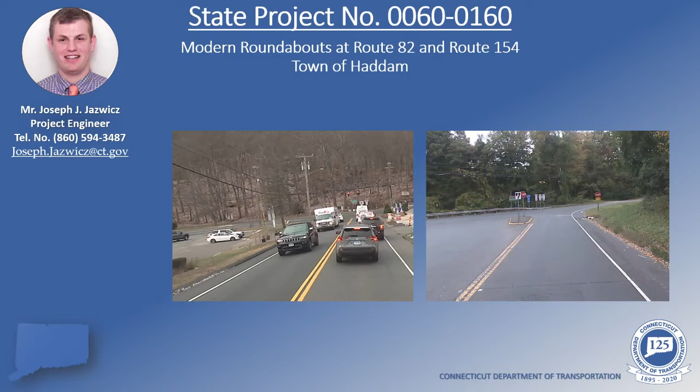This project is located on the overlapping portion of Route 82/154, otherwise known as Saybrook Road. To the east of our project, we have the Connecticut River and the East Haddam Swing Bridge. And to the west, we have Route 9. Our project is going to focus on two main intersections, which we refer to as the northern and southern intersection. The northern intersection is located where Bridge Road intersects Saybrook Road, and the southern intersection is located where the Route 9 connector intersects Saybrook Road. We'll also be discussing Bridge 622, which carries Saybrook Road over Clark Creek.

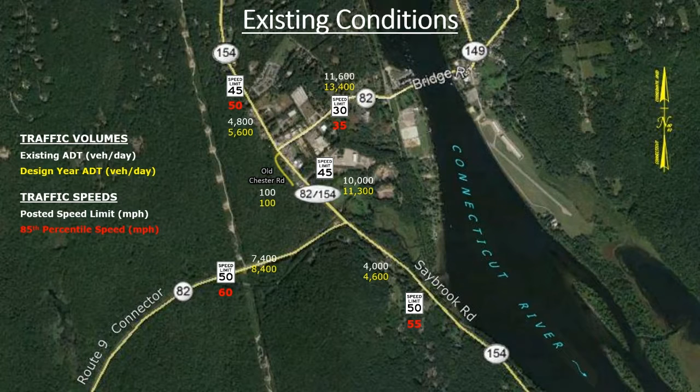Also, we look at traffic speeds throughout the corridor. As you can see here on the placards, we have our posted speed limits on our various approaches, and in red, you can see our 85th percentile speeds. 85th percentile is merely the speed at or below which 85% of vehicles will travel. It's also important to note that the 85th percentile speed is used as our design speed for our roadway geometrics when designing our roads. So for example, on the Route 9 connector, we have a posted speed of 50 miles per hour. However, the 85th percentile is 60.

Some areas of interest within the project area include the Tylerville Business District at the northern intersection, Eagles Landing to the east, as well as a Saybrook Assisted Living Facility to the north. Also, the East Haddam Swing Bridge is located 2/3 of a mile from the northern intersection. Saybrook Road and Bridge Road are a part of the State On-Road Bike Network.

Let's dive a little bit deeper into the northern intersection. The northern intersection is currently a signalized intersection. The existing equipment out there today is 27 years old. Typical service life is around 20 years, at which point we see additional maintenance and upkeep is required in order to maintain a state of good repair for the signal equipment. Also, I'd like to draw attention to the minimal pedestrian accommodations that are currently provided at this intersection.

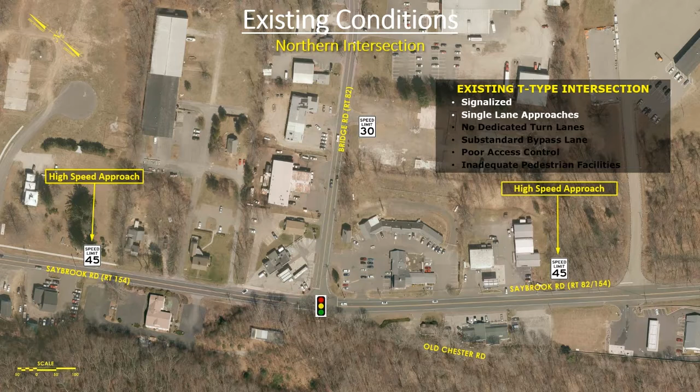Here's a plan view of the northern signalized intersection. We have single lane approaches on all approaches. However, Saybrook Road are considered high-speed approaches. We have no dedicated turn lane that exists at the intersection, as well as we have substandard bypass lanes where vehicles are using the processed aggregate off the edge of road in order to make bypass maneuvers around vehicles that are trying to turn left onto Bridge Road.

We have poor access control due to the number of driveways that are in close proximity to the intersection footprint. And finally, we have inadequate pedestrian facilities. We have narrow shoulders that aren't conducive to bike travel. We don't have any sidewalks that are prevalent here, nor do we have any dedicated crosswalks.

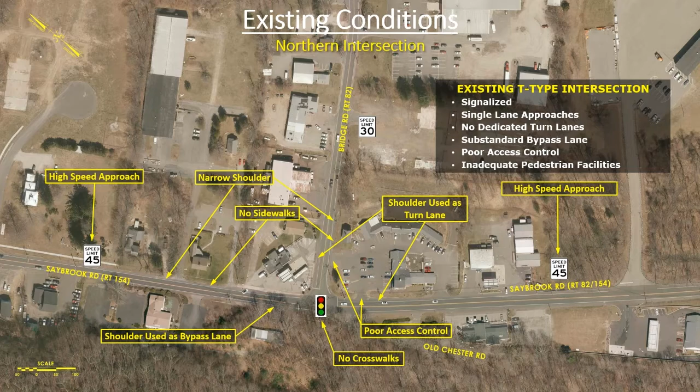Moving on to the southern intersection. The Route 9 connector is a stop-controlled approach. It is considered functionally deficient due to the large queues and backups that form along that approach. Saybrook Road is considered a high-speed free-flow facility.

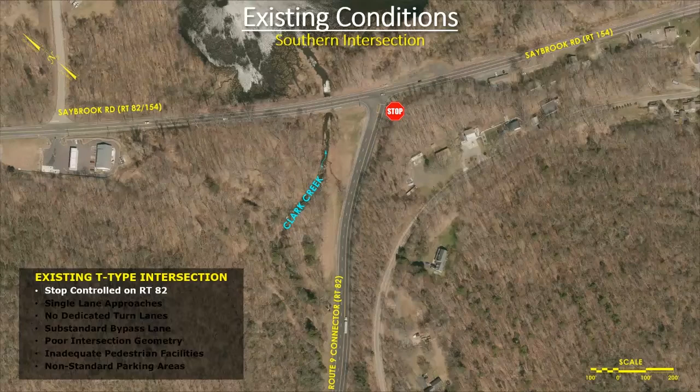Here's a plan view of the southern stop-controlled intersection. We have single-lane approaches on all approaches. All are considered high-speed. We currently have no dedicated turn lanes that exist here, as well as we also still have substandard bypass lanes. And we have poor intersection geometry that is created by the skew of the Route 9 connector as it intersects Saybrook Road.

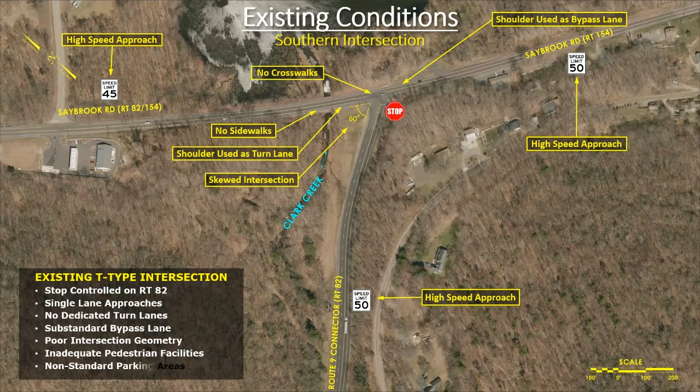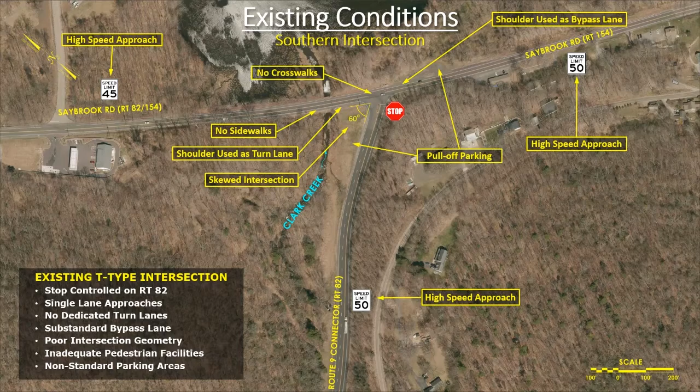We have inadequate pedestrian facilities. There's no sidewalks, nor are there any crosswalks that are present here. And finally, we have non-standard parking areas. Currently, these two pull-off areas are used by vehicles that are trying to access the Clark Creek Cascades. The department recognizes this natural feature that is in existence at the southern intersection, and we plan to incorporate parking into our proposed design, which we'll explain further on in our presentation.

Predominant turning movements that exist within our project area consist of, in the AM, vehicles traveling from destinations east through our project limits in order to access Route 9. In the PM, we have the opposite movement where vehicles are traveling from Route 9 through our project limits in order to access destinations east via the East Haddam Swing Bridge.

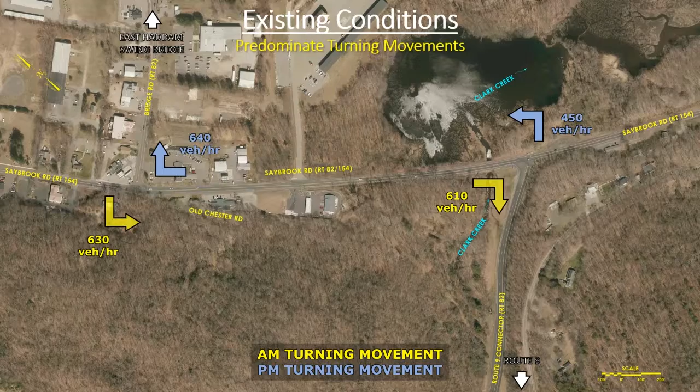As a part of the department's initial review, we look at crashes that are occurring within our project limits. We gather crash data over a course of a 3-year period. From that data, we develop crash diagrams to show the location, type, quantity, and the severity of those crashes. Once a crash diagram is developed, we analyze them for patterns.

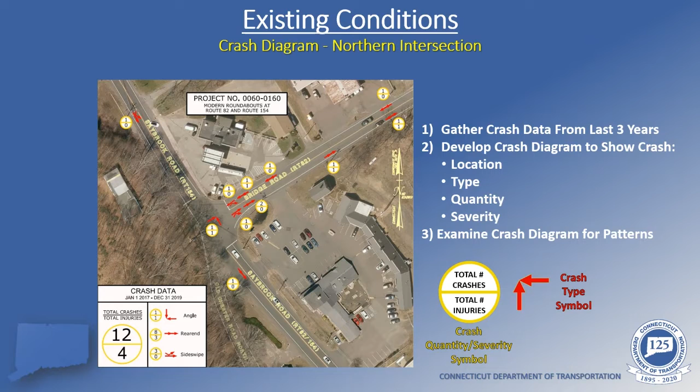Over a course of a 3-year period at the northern intersection, we saw a total of 12 crashes resulting in 4 injuries. Those crash types consist of angle, rear ends, and side swipes. While there aren't many crashes occurring here today that are anything abnormal, we would like to note that there was one angle type crash that occurred here. While it's a low frequency event, they tend to have high severity, and that is due to high vehicle speeds that are seen on Saybrook Road throughout our project area.

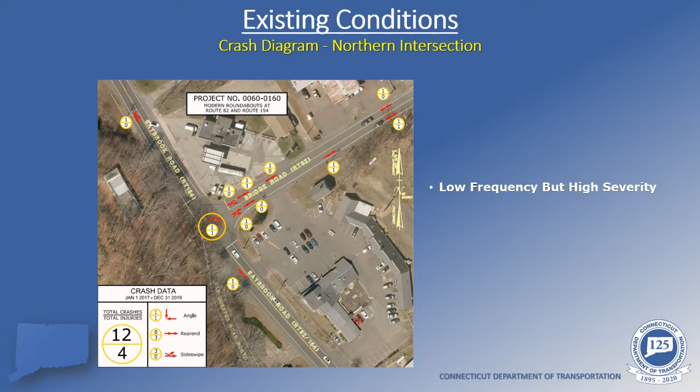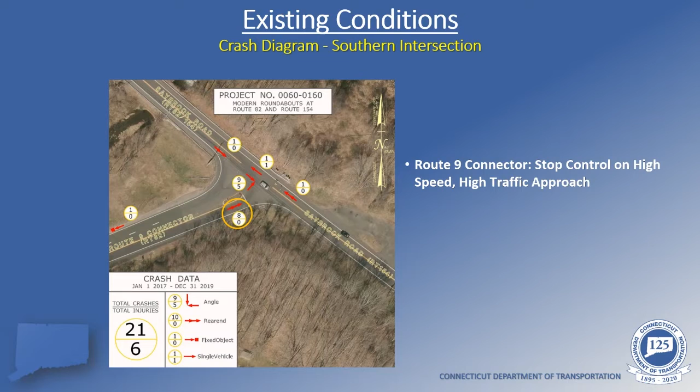Over the course of that same 3-year period, there was a total of 21 crashes resulting in 6 injuries that occurred at the southern intersection. There's 2 main prevalent crash types that are occurring here. The first being rear ends that are occurring on the Route 9 connector. This can be attributed to the stop control on the high-speed approach, as well as the high traffic volumes that are seen along that segment of roadway.

The second are these angle type crashes that are occurring within the intersection. This can be attributed to Saybrook Road being a high-speed, free-flow facility, as well as driver expectations of a vehicle trying to depart the Route 9 connector. If a vehicle is traveling southbound, based off of traffic turning volumes, 80% of them are trying to access the Route 9 connector, whereas 20% of them are trying to continue on a through movement.

Based off of driver expectation, a vehicle trying to depart the Route 9 connector to make a turning maneuver onto Saybrook Road is envisioning vehicles to make a turn onto the connector. However, sometimes they're continuing on a through movement, which creates a conflict point leading to a number of angle crashes, which is prevalent here.

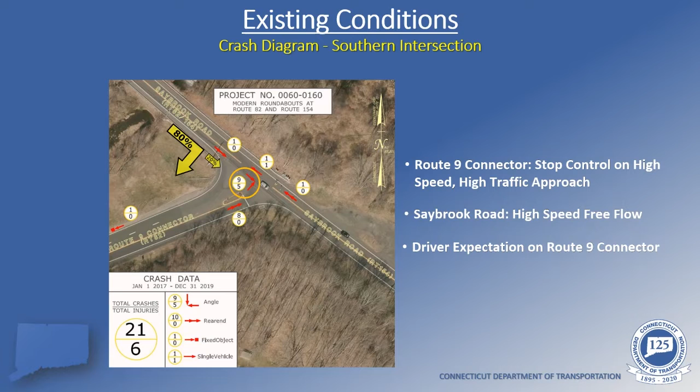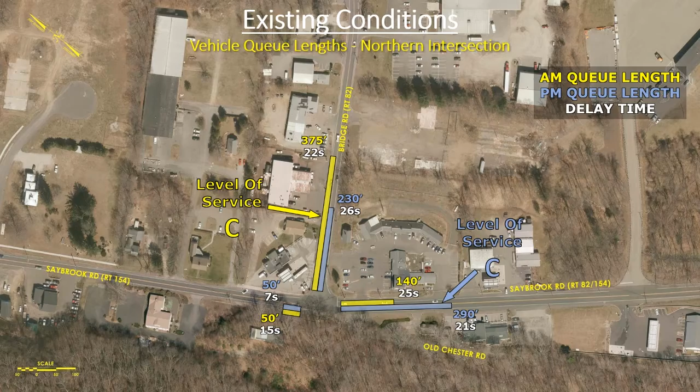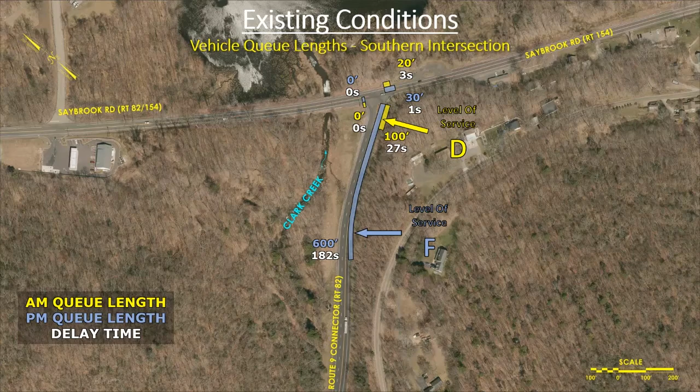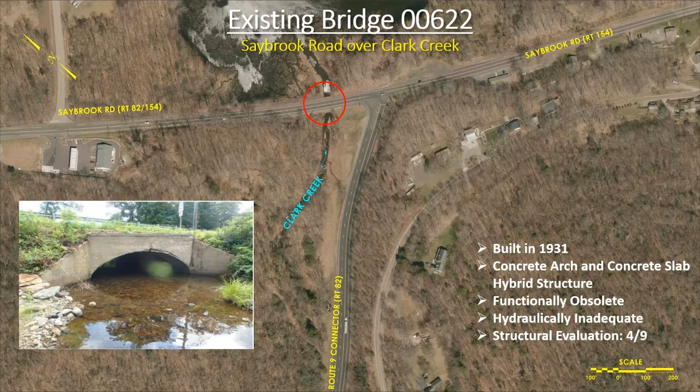Immediately north of the southern intersection, we have Bridge 622, which carries Saybrook Road over Clark Creek. It was built in 1931. It's a concrete arch and concrete slab hybrid structure. It's considered functionally obsolete and hydraulically inadequate based off of our hydraulic analysis. The most recent structural evaluation gave this structure a 4 out of 9. Based off the condition and age of this structure, the replacement of this bridge was added to the scope of this project.

Project purpose can be broken down in 3 separate areas. We like to refer to them as project goals. First, we want to increase safety by reducing the vehicle speeds throughout the corridor, as well as the frequency and crash severity that they're experiencing. As well as we also want to increase sidewalk connectivity. Second, we want to improve traffic operation by reducing vehicle backups and the delays that they're experiencing. And finally, we want to replace Bridge 622 as a part of this project. I will now turn it over to Charlie, who will talk about the proposed improvements.

All right, thanks, Joe. My name's Charles Grillo, and I am the project designer assigned to 6160. And at this time, I'm going to be talking to you about the proposed project improvements. So based on those existing conditions and the project goals that were just previously discussed, the department determined that the preferred alternative for both the northern and southern intersection was going to be the modern roundabout.

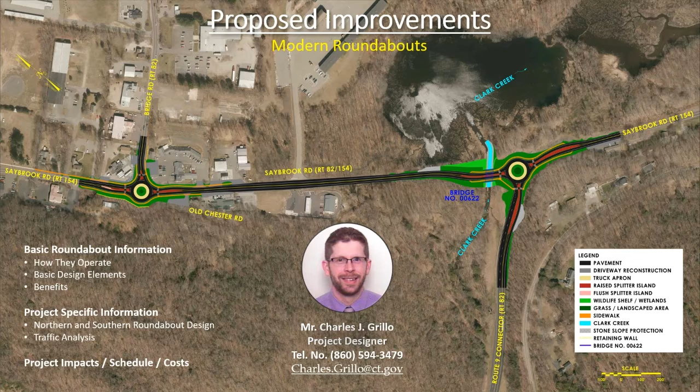So first thing I'm going to cover are some basic roundabout information, such as how they operate, their design elements, and some general benefits. After that, I'll get into some more project-specific information related to design considerations for both the northern and southern roundabout and a traffic analysis for both of those. And finally, I'll wrap up with a description of the project impacts, schedule, and cost.

All right. The first thing we're going to talk about is the basic operations of a modern roundabout. So vehicles approaching a roundabout need to slow down to about 15 to 20 miles an hour before they enter the roundabout. Vehicles approaching the roundabout also have to yield to vehicles that are already inside of the circulatory roadway. Once a vehicle enters the circulatory roadway, they have the right of way and don't have to yield or stop at that point. And when a vehicle wants to exit the roundabout, they simply engage the right-hand turn signal and then exit the roundabout.

Bicyclists can enter the roundabout with traffic, meaning they'll take a lane and then they can traverse through the intersection in that fashion. Or if they're uncomfortable with that, they can dismount and then they can use the sidewalks and crosswalks to get to the intersection. Pedestrians will obviously be using the sidewalks and they will be crossing at the designated crosswalks.

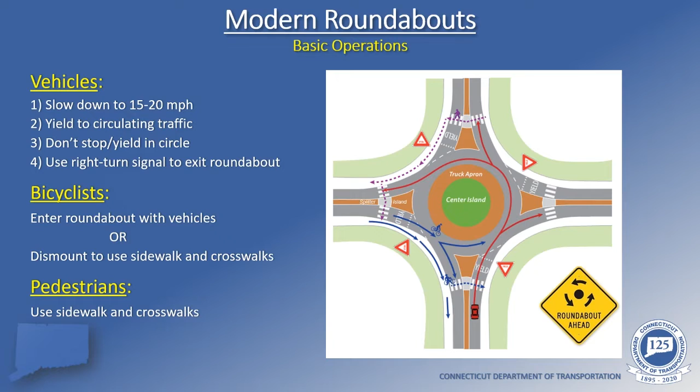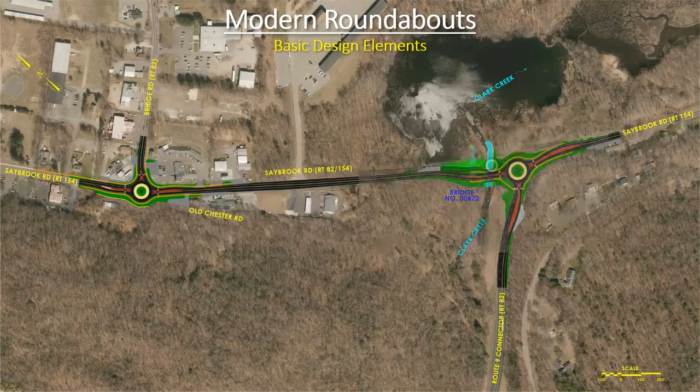Next thing I want to talk about are some basic design elements that are common for all modern roundabouts. So I'm just going to use the southern roundabout to describe these. And the first element I'm going to talk about are the splitter islands. Splitter islands are these raised median structures. They are typically granite curbing with a stamped concrete finish, as you can see in the photo there. And they're designed to channelize traffic and induce curvature.

So this is really important because we need to safely and slowly bring vehicles' speeds down before they enter the roundabout. So taking the Route 9 connector, for example, where speeds are upwards of 50 or 60 miles an hour, we have these successively tighter curves on that approach that physically slow the car down so it can enter the roundabout at that safe 15 to 20 miles an hour. So the splitter islands help direct the cars through those curves and slow them down.

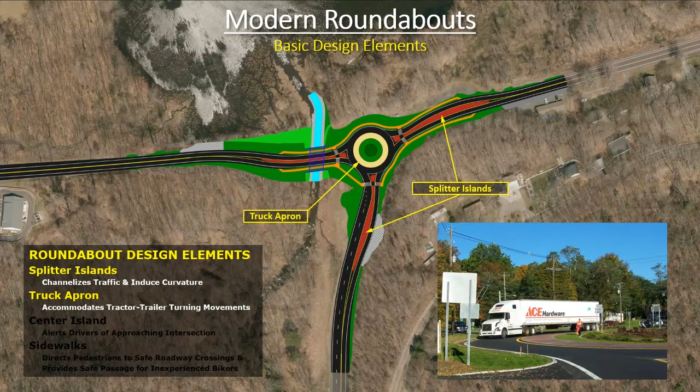Next design element we're going to talk about are the truck aprons. Truck aprons are designed to accommodate tractor-trailer turning movements through the intersection. So as you can see in the photo, the cab of the truck is designed to stay on the circulatory roadway, but the back end trailer can track over the truck apron as that truck is making a turn. So the truck aprons are typically granite curbing with stamped concrete finish, but these are mountable, so they have a lower profile than the splitter islands, and they're designed so that the truck can mount it, but it would be uncomfortable for a passenger car to drive over top of that.

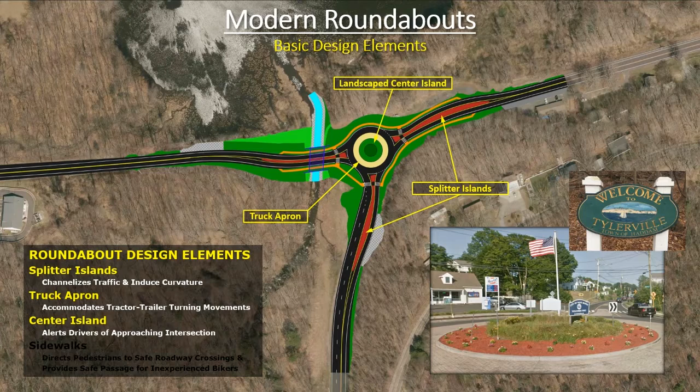All right, next element we're going to talk about are the center islands. Center islands are designed to alert drivers that they're approaching an intersection by providing a visual break in the roadway. So this has a proven traffic calming effect, so vehicles will slow down when they see that center island. Center islands also can be used as a gateway treatment to the community, so you can plant landscaping and install a sign, sort of like what we see in the photo there.

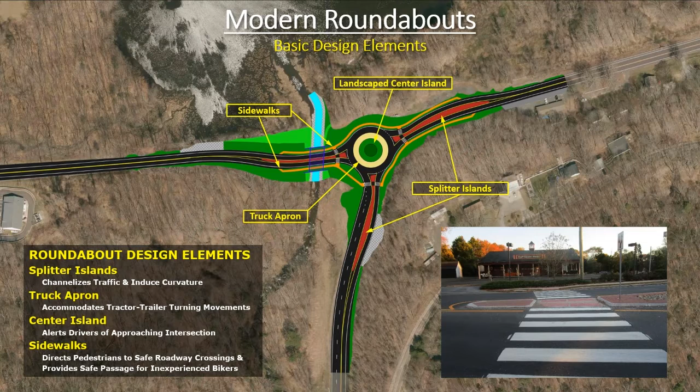All right, last design element to talk about are the sidewalks. Sidewalks are required to direct pedestrians to the safe roadway crossings. So we want them crossing at designated crosswalks using that pedestrian refuge area in the splitter island, as you can see in the photo. And what we don't want to see are any pedestrians crossing in the truck apron or center island. So it's very important that we direct pedestrians to those safe roadway crossings. And then also, the sidewalks are designed to provide safe passage for inexperienced bikers. So the bikers need to be able to dismount and then walk through the intersection if they're uncomfortable with riding through the intersection with traffic.

So roundabouts achieve their safety benefits in two main ways. First one we're going to talk about is the fact that they reduce conflict points. Now, conflict points are all the opportunities that two cars have to collide with each other at any given intersection. So what you will notice is roundabouts eliminate all the crossing type conflict points. And the crossing conflict points are the most severe. They're the ones that result in either T-bone or head-on type crashes. And what a roundabout is left with are just those diverging and merging conflict points, which generally result in sideswipes or rear ends, which are the less severe type of crashes.

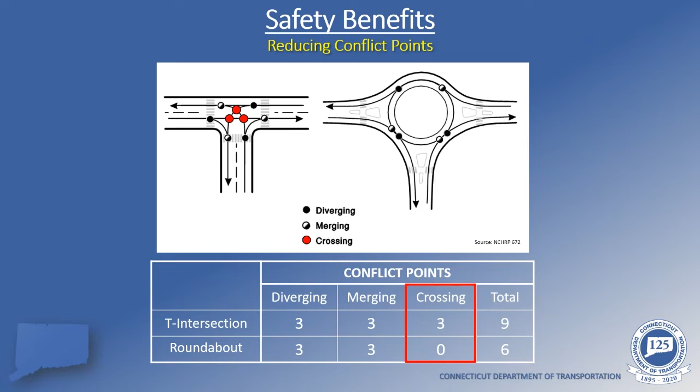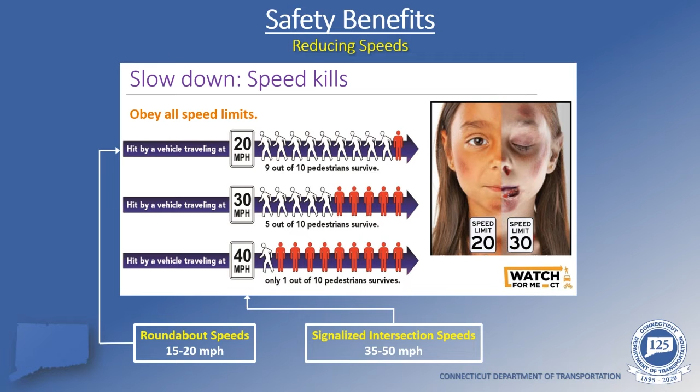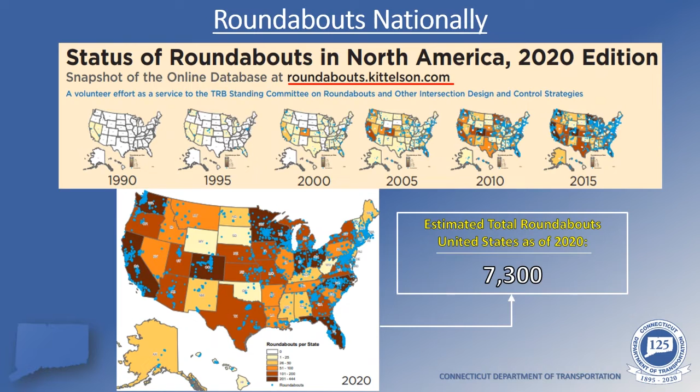So because of this, roundabouts have been increasing in popularity over the years. In the United States, you can see in the 1990s, there was just a few roundabouts in California and Nevada. But 30 years later, you can see now we have over 7,000 roundabouts in the United States. And in Connecticut, we're also trending towards installing more roundabouts. Currently, we have 13 that are installed and operational, and we have another 14 in design, planning, or construction.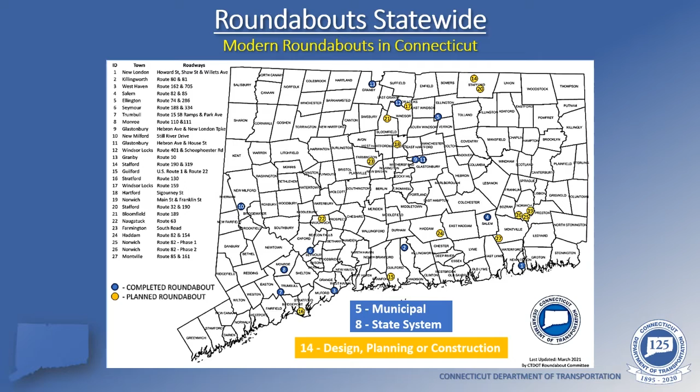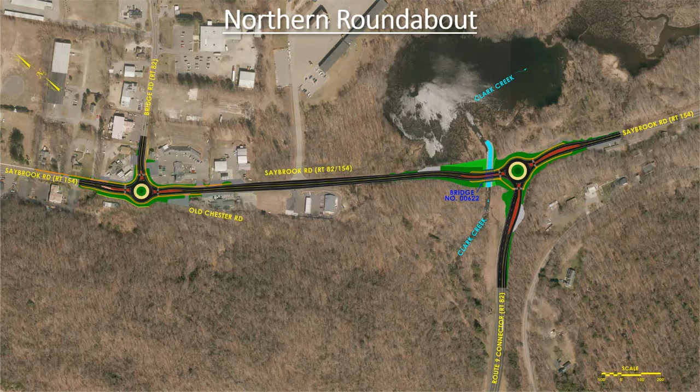Now we'll discuss some project-specific design considerations that went into the design of the northern and southern roundabouts. And we'll start off with the northern roundabout. So the first design consideration we're going to talk about is a roundabout footprint. So there are a lot of businesses within very close proximity to this intersection, and we want to reduce the impacts to those businesses by reducing the footprint of the roundabout as much as we could. So the first thing we did was propose this 115-foot inscribed circular diameter, which is a little bit on the smaller side for a single lane roundabout, but we're able to get that in.

And then we also wound up shifting the roundabout slightly to the west. There was a large hill to the west of the intersection, but we're proposing to install a retaining wall to help limit the impacts of the cut slopes in that area.

Next design consideration to talk about is access control. So we wanted all vehicles to be able to make left and right hand turns out of all the driveways within the project area. So we're proposing a flush splitter island be installed along the Saybrook Road southbound approach so that vehicles can make left and right hand turns out of the Mobil gas station there. And the other access control issue was we did have a lot of driveways within close proximity to the intersection. So we are proposing to close one driveway and relocate another slightly at the Tylerville Village Plaza.

Sidewalk connectivity was a big consideration at the northern intersection. We wanted to be able to tie into existing sidewalk to the north of our project that went to the assisted living facility. And then we also wanted to tie into project 60-162, which is proposing to build sidewalk from Eagles Landing along Bridge Road to this intersection. So we're also going to be tying into the sidewalk that is constructed under that project.

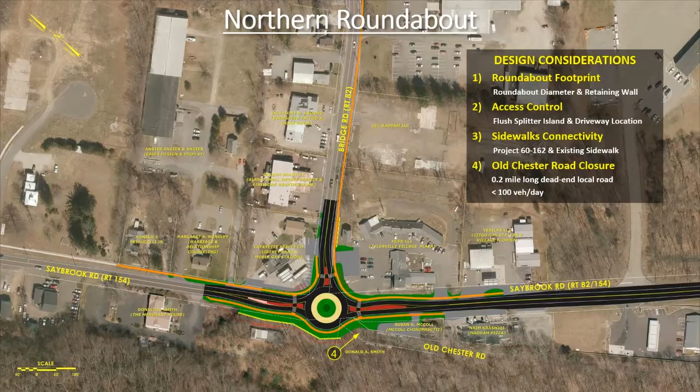Next, we're going to talk about some design considerations that went into the southern roundabout. So the first thing you can see is that the southern roundabout has a 130-foot inscribed circular diameter that is more typical for single-lane roundabouts. Just want to point that out. But the first design consideration we're going to talk about are the high-speed approaches. So because we have vehicle speeds of 50 or 60 miles an hour approaching this intersection on all legs, you're going to see these longer splitter islands, which are required to safely slow the vehicles down before they enter the roundabout.

Next design consideration to talk about is replacement of Bridge 622. So we're proposing to relocate this bridge upstream on Clark Creek. We're doing this so that we can build this bridge entirely offline, meaning we can construct it while still maintaining traffic on the existing bridge. Also, when we relocated that bridge upstream, it helped with the curvature we wanted to induce to help slow vehicles down before they enter the roundabout on that leg.

Bike connectivity was a consideration for this intersection. Although there's obviously not as much pedestrian and foot traffic here, Saybrook Road is part of the state on-road bike network. So because of that, we really want to make sure we provided those sidewalks so inexperienced bikers can dismount and walk through the intersection.

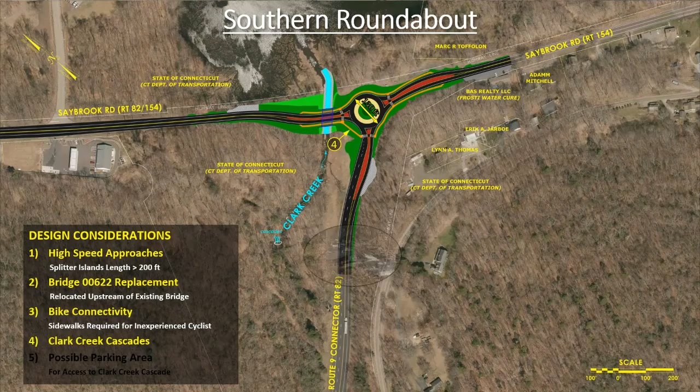The next consideration was the Clark Creek Cascades. So we recognize that this is a draw for the public and local residents. So we wanted to incorporate this into design. So there's a possibility of us installing a viewing area of some sort in the location shown there. We're going to discuss this with the town and sort of try to figure out something that they would like to see installed there. And then in addition to that, we were hoping to install some official parking areas and kind of get rid of those dirt pull-offs.

So we'll install the parking, and then people can either use the sidewalk system or a trail system to access the Cascades. So none of that's finalized yet, but we're talking with the town, and hopefully we're going to be incorporating this into design in the near future.

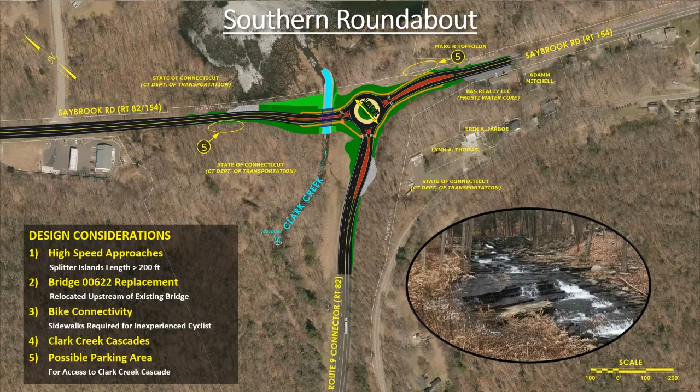So next we're going to talk about the 2040 queue lengths and delays at the northern and southern intersections. So queue lengths, again, are just the backup we were expecting to see, and 2040 is the design year, so we're going to be using those projected future traffic volumes when we're analyzing these intersections at this point. So we're going to be comparing the no build and the roundabouts.

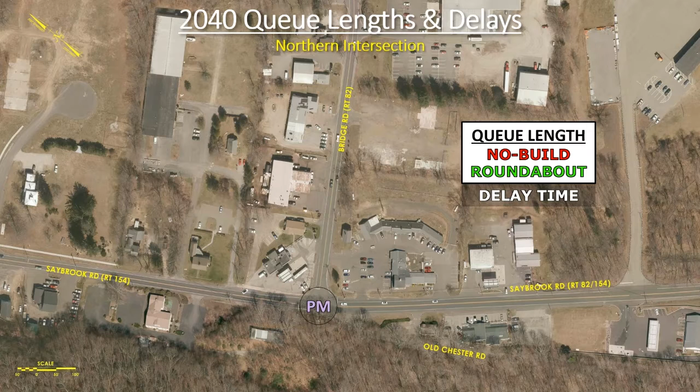Next, we'll look at the PM peak hour. So in the PM, we have the larger backup on Saybrook Road northbound as cars are coming from Route 9 and then trying to turn right and head over the Swing Bridge. So as you can see, the roundabout handles traffic better than the signalized intersection. Not as big of an improvement there, but still handling it better.

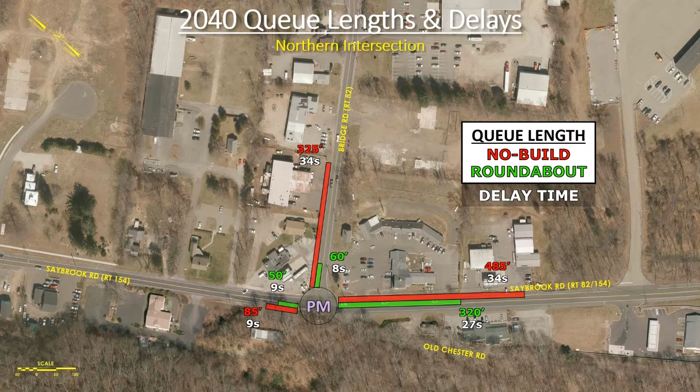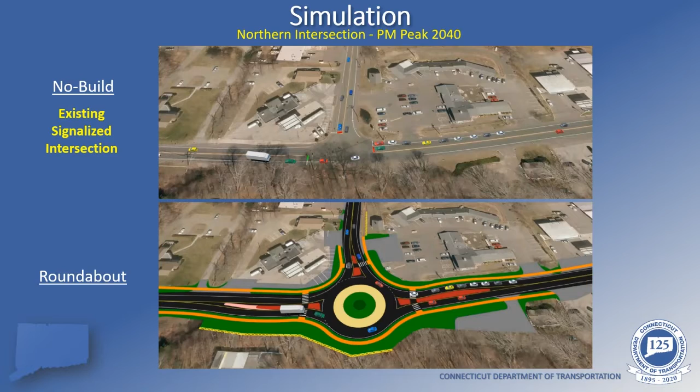Right, now we can talk about the southern roundabout. So AM queue lengths here. No build is stop controlled on the Route 9 connector. So you can see a backup from that. And then again, Saybrook Road is free flowing, so there are no backups or delays there. And you can see how the roundabout handles that. Obviously, there's a larger backup on Saybrook Road because you're going from free flow in the existing condition to the yield control with the roundabout. So there will be a little bit of an increase of backup there.

But one thing I want to draw your attention to is the fact that you can see that the backup for the roundabout and the signalized intersection are both 180 feet. But you can see how the delay, the roundabout basically clears its backup almost 5 times faster than the stop sign can. So I just want to draw your attention to that.

Looking at the PM peak backup, you can see that the Route 9 connector with the stop control just really isn't acceptable with nearly 1,000-foot backup and 6 minutes of delay. Just something that really needs to be addressed. And these are the backups and delays for the roundabout. So considerably better than the existing stop controlled intersection.

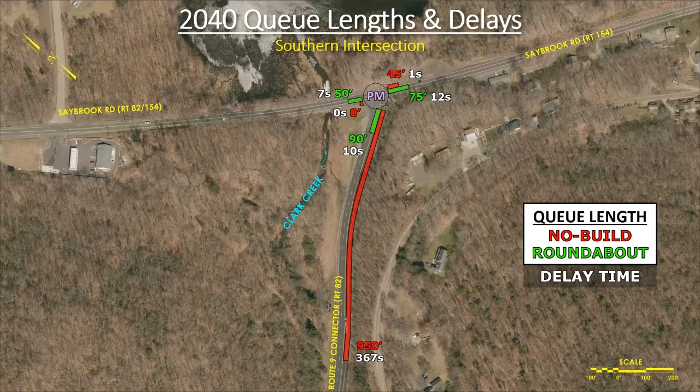Before we move on, I just want to take a moment and discuss the East Haddam Swing Bridge, which was brought to the department's attention by the town and numerous residents as a source of concern. Essentially, the problem being when the East Haddam Swing Bridge is in the open position, traffic can back up on Bridge Road all the way to the intersection with Saybrook Road, and sometimes even back up along Saybrook Road to the intersection with the Route 9 connector.

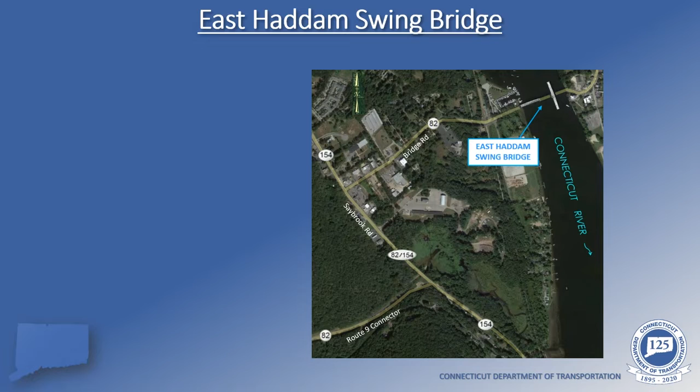So the department recognizes this issue, and while unfortunately we can't really do a whole lot to address that with the intersection improvements proposed on 6160, I did want to make everyone aware that there is another project that is currently being proposed, Project 40141, which is going to rehabilitate the swing bridge and improve the mechanics of it.

So with the completion of that project, the department is anticipating to see a swing cycle time reduction of about 20%. So with that reduction in the cycle time, you can expect to see up to 1,000-foot reduction in the backups on Bridge Road. And essentially, with the reduction in backups and the improved operations of the swing bridge, we're hoping to see a reduction in occurrences of the backups on Bridge Road reaching the northern intersection.

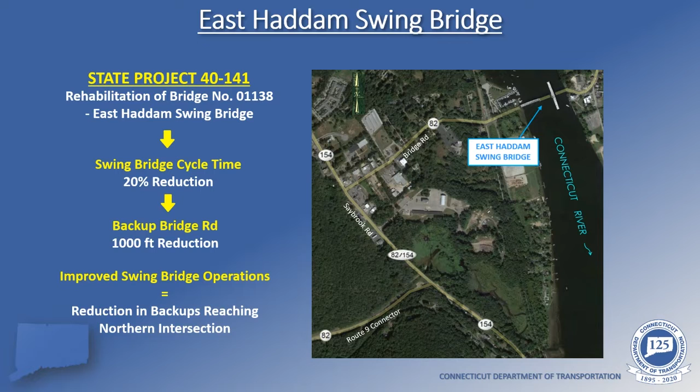All right, now we're going to start our conversation about the project impacts, and we're going to begin with the rights-of-way impacts. So at the northern intersection, there are a lot of businesses within close proximity to that intersection, and that is where we're going to see the majority of our rights-of-way impacts. So the department is anticipating partial acquisitions of 5 properties, and an additional 10 properties are going to require easements or rights in that location.

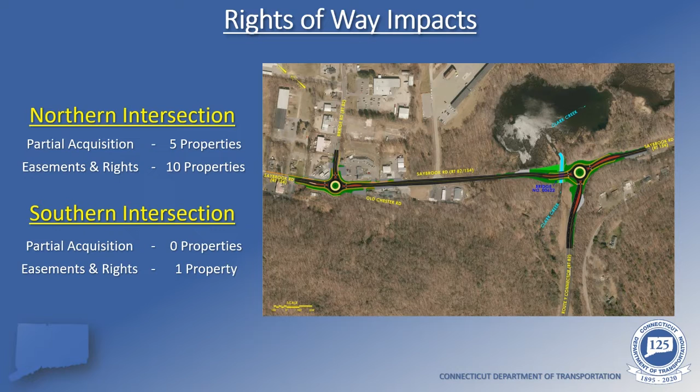At the southern intersection, rights-of-way impacts are not as big a problem or a concern, so we only anticipate 1 property requiring a right or an easement there. So with us in the meeting today, we have Matt Giannakopoulos, who works for the department in the rights-of-way unit, and he is going to discuss the rights-of-way process in a little bit more detail at this point. So I'm going to hand the presentation over to him now.

Thank you, Charlie. I am Matt Giannakopoulos, and I am a right-of-way coordinator with the Department's Division of Rights-of-Way. It is our office's responsibility to acquire the property rights needed for transportation projects. The proposed project design requires the acquisition of property rights, so I'd like to give a brief overview of the Department's right-of-way acquisition process. Please keep in mind, though, that the specific impacts are still being fine-tuned and may change as the design progresses.

Any property rights will be acquired in accordance with Connecticut General Statutes Sections 13A-73 and 13A-98E. And whenever there is federal money used in any phase of a project, the department must adhere to the Uniform Relocation Assistance and Real Property Acquisition Policies Act of 1970 as amended. Once the design has moved to the point where we are ready to begin the acquisition process, each affected property owner will receive a formal letter of intent to acquire from our office, along with a property map which depicts the exact property rights to be acquired.

At that point, our office will determine the fair market value of those property rights and use that value to establish an offer of just compensation. The offer will be sent out to the owner in writing, and a right-of-way agent will be available to meet with the property owners and explain the project, go over the specific impacts to the property, and explain how the state developed its offer. The property owner will have a reasonable time to consider the state's offer and enter into negotiations. If an agreement is reached, the state will prepare all the necessary paperwork and record the deed and the property map on the town land records.

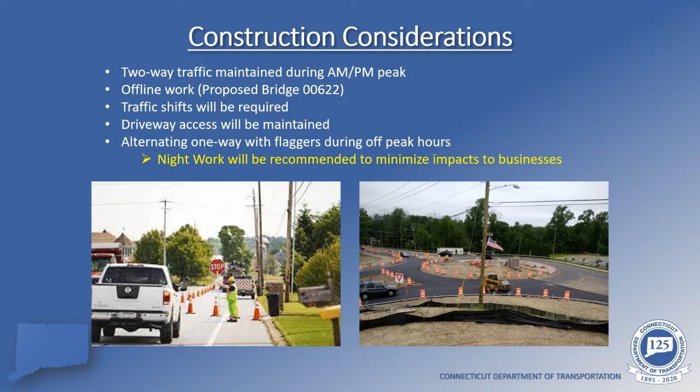And project 40141, the rehabilitation of the swing bridge, is going to be happening concurrent with our project. And project 6162, the Bridge Road Sidewalk project, is going to be happening ahead of our project. So we've begun coordinating already with those designers, and we're going to make sure that the construction process is as smooth as possible.

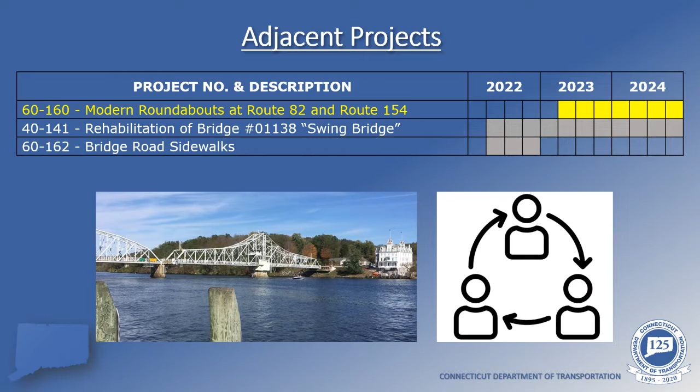So the last thing I'm going to talk about is the project cost and schedule. Construction cost is going to be about 7.3 million. Of that, 80% is going to be federal, 20% is from the state. We're expecting to complete our design in the fall of 2022, starting construction in the spring of 2023, and then we'll be wrapping construction in the fall of 2024.

So this concludes the formal presentation of Project 6160. And at this time, we're going to be moving into the question and answer phase of tonight's meeting. So I just want to let you all know that there are a number of ways that you can submit your questions to the design team. Right now, you can enter your questions into the MS Teams chat window if you're present at the live event. We are also accepting questions via the project email.

So that would be dotproject60-160@ct.gov. You can also phone in your questions to the project voicemail. So the number for that is 860-944-1111. So yep, all those questions, just send them in. We're going to be posting them into the Q&A chat window, and then we'll be answering them live right now. So yeah, thank you very much for your time, and I'm going to be handing this over to Joe Arsenal now.

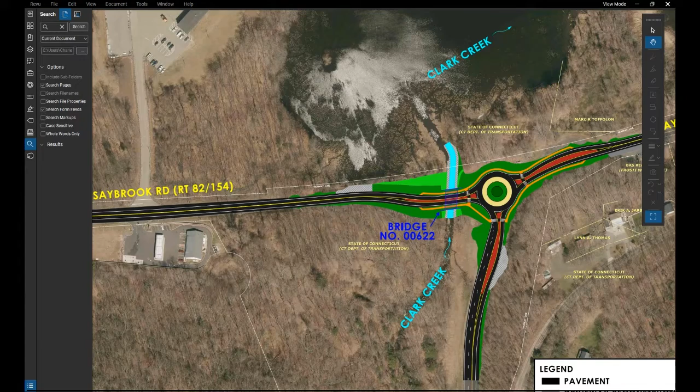Yeah, thanks, Joe. As Charlie talked about earlier in the roundabouts basic operations, when we look at truck turning movements, we design them based off of a certain type of design vehicle. So in this case, it's a tractor trailer, as was shown in that picture. And we design our truck apron to accommodate the cab that is tracking on the circulatory roadway, but the trailer itself actually tracks on the truck apron. So it's designed to traverse through the circulatory roadway in that type of fashion.

In regards to the oversteering, we use software that has a turning analysis based off of industry standards, so that we make sure that we're not over tracking, hopping curbs, minimizing that to the best of our ability based off of what the software is showing for us.

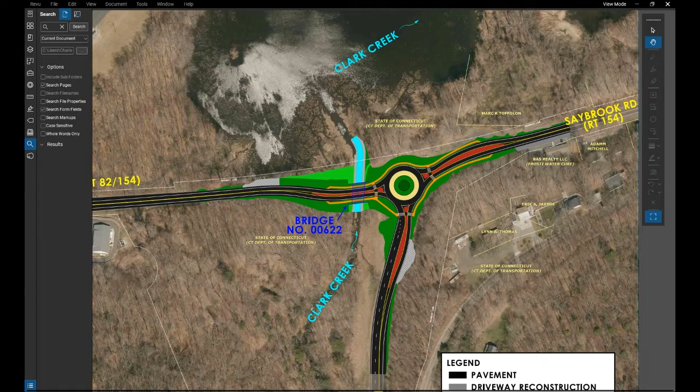Okay, thanks, Joe. Looks like we just got another question in. The question is, had the DOT completed thorough due diligence at peak traffic with a bridge opening scenario? It appears that the traffic studies conducted to justify this $7.3 million project were all conducted at less than realistic conditions, i.e. pandemic, rainy, cool, Monday, etc. So I could start off with a little bit about this. I actually believe our traffic data was collected during 2017, and I believe we collected it during the summertime and also off-season times. Joe Jaswitz, can you confirm that?

Yeah, that's correct. When we originally collected our traffic data it was during the spring time frame, but we were concerned about seeing an increase in vehicle traffic due to summer, due to the tourist industry. So we also collected midday summertime traffic volumes. Okay, great. So what you might be referring to is we do have traffic volumes that we post online. Some of those were conducted potentially during the pandemic and these other situations you're talking about, but the traffic data we're using for this was not taken during those times.

And again, we do project that data out. We basically use a conservative method, assuming some amount of growth in the area. So when we look at the average daily traffic, what we're actually designing for is an increase of, I think for this project, over 10% of what we actually collected for data. So we are checking our design against those higher values. And with that, we're pretty confident with our analysis that the roundabout will function well.

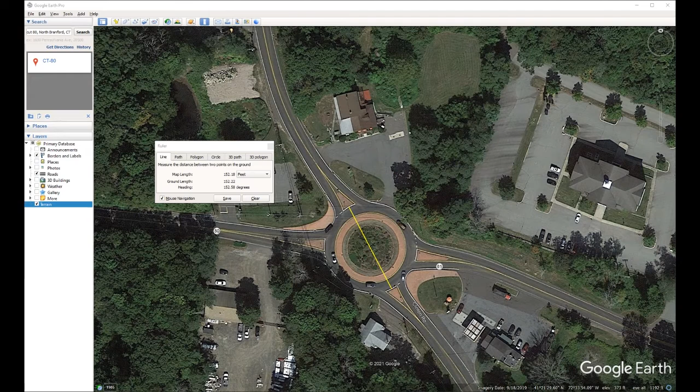And then to the second point of your question, we are looking at closing Old Chester Road. Currently, all the property owners on Old Chester Road have access to Route 154 by other means. So we wouldn't be displacing anyone on there, and anyone that still had access, we would maintain that access. We would be obligated to maintain some kind of access to Old Chester Road. But we do feel it would be the best option as far as making that roundabout simple and not having that 4th leg kind of intersecting it.

We are not considering opening a new access road at this point, although it is possible that we could run a new access road over from Route 154 further south to that area if there was a need.

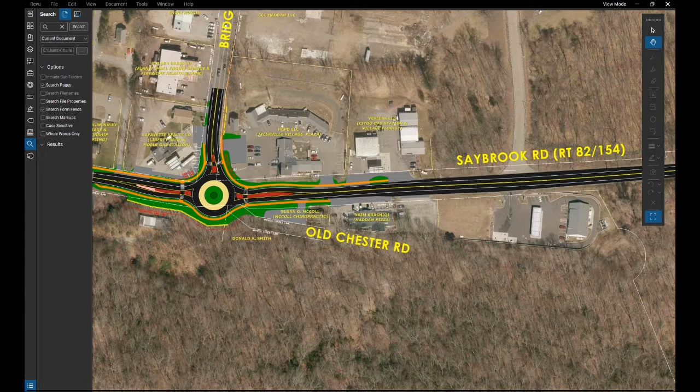So we just got another question in that says, have you factored in all the new apartments proposed? And no, I don't believe we're familiar with any new apartments. Maybe we could get some further information from the town about that and make sure we are accommodating any additional traffic volumes that we would be getting from those. So yeah, thank you for the comment, and we'll coordinate with the town on that and make sure we're addressing that.

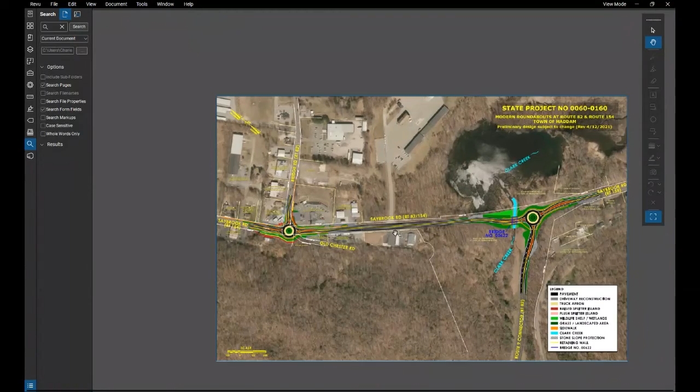Okay, next question we have is: first, I encourage a parking area near the falls that you mentioned during the presentation. However, I still think all the Tylerville stores may generate a number of pedestrians who would walk to the falls if a sidewalk is provided. Yeah, thanks for the question, the comment. Right now, as you can see, our color plan is not showing a sidewalk extending all the way to Southern Roundabout, but it is something we're strongly considering.

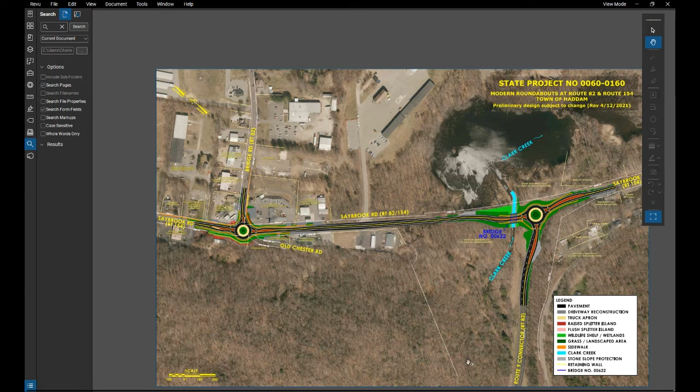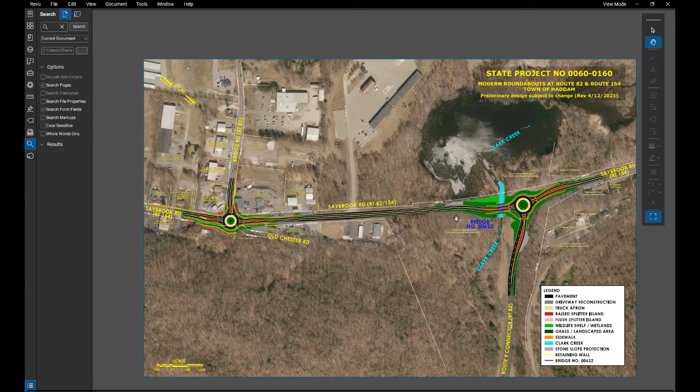If the town and the locals think that there's going to be a draw to have pedestrians walking down there, it's certainly something we could look at incorporating. And certainly if we end up putting a permanent parking facility in along the west side of Saybrook Road, it would make even more sense at that point to have some kind of sidewalk connecting the two roundabouts. So definitely something we'll be looking at as we move forward, and probably coordinating closely with the town on that, making sure we get that in if that's something the town and the people want. So thank you.

Okay, we just got another question, and it says: are the two circles designed such that they could be relatively easily expanded to two lanes without completely redesigning them in the future? It would be difficult to turn those into two-lane facilities in the future. It would require additional right-of-way. I would think that the truck aprons and the center islands could remain, and probably a lot of the island structures could remain in place. But it would mean some significant impacts.

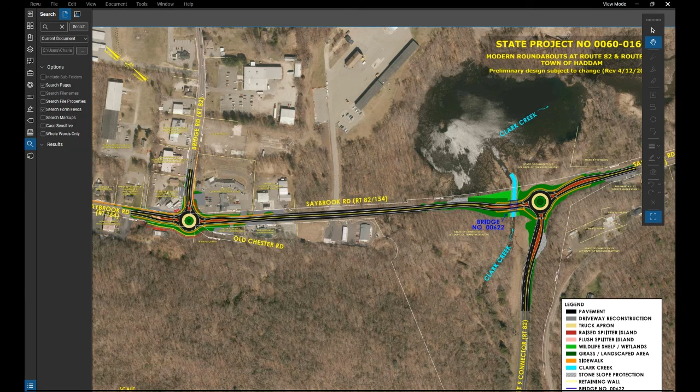And based on our data and our forecasting, we don't really see that it's likely that there's going to be a need to widen those out that much. These should function much better than the facilities you have in place today. I think once these are in place, people will realize how well they flow and function. Oftentimes when we put roundabouts in, they actually perform better than what our analysis shows. So I hope that answers the question.